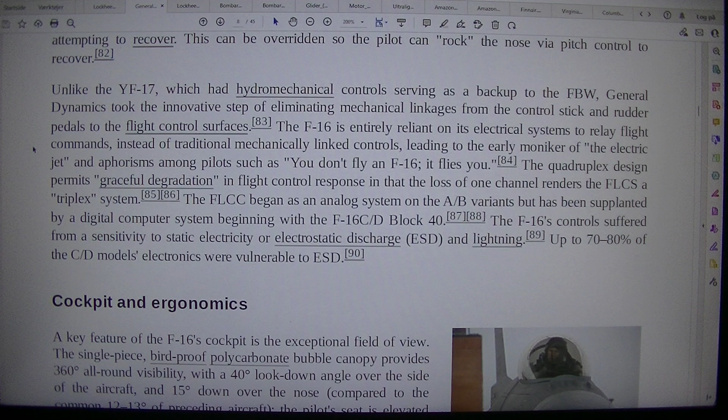The FLCC began as an analog system on the A/B variants but has been supplanted by a digital computer system, beginning with the F-16C/D Block 40.

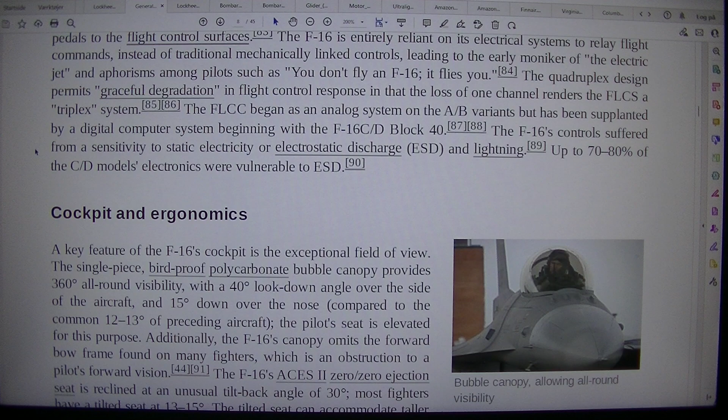The F-16's controls suffered from a sensitivity to static electricity, or electrostatic discharge (ESD), and lightning. Up to 70-80% of C/D models' electronics were vulnerable to ESD.

Cockpit and ergonomics: a bubble canopy allowing all-round visibility. A key feature of the F-16's cockpit is the exceptional field of view.

The single-piece, bird-proof polycarbonate bubble canopy provides 360-degree all-round visibility, with a 40 degree look-down angle over the side of the aircraft, and 15 degrees down over the nose, compared to the common 12-13 degrees of preceding aircraft.

The pilot's seat is elevated for this purpose. Additionally, the F-16's canopy omits the forward bow frame found on many fighters, which is an obstruction to a pilot's forward vision.

The F-16's ACES II 0/0 ejection seat is reclined at an unusual tilt-back angle of 30 degrees. Most fighters have a tilted seat at 13-15 degrees.

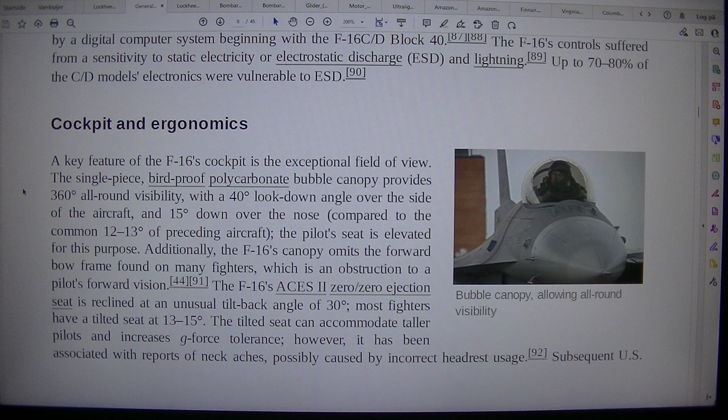The tilted seat can accommodate taller pilots and increases G-force tolerance. However, it has been associated with reports of neck aches, possibly caused by incorrect headrest usage. Subsequent U.S. fighters have adopted more modest tilt-back angles of 20 degrees.

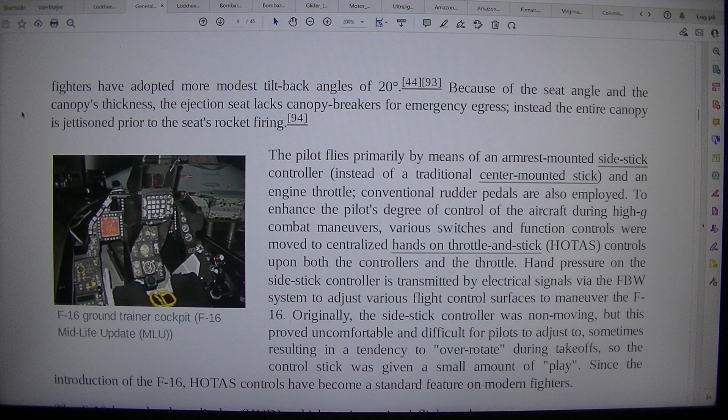Because of the seat angle and the canopy's thickness, the ejection seat lacks canopy breakers for emergency egress. Instead, the entire canopy is jettisoned prior to the seat's rocket firing.

Cramped cockpit of jet trainer, showing dials and instruments. F-16 ground trainer cockpit, F-16 midlife update (MLU).

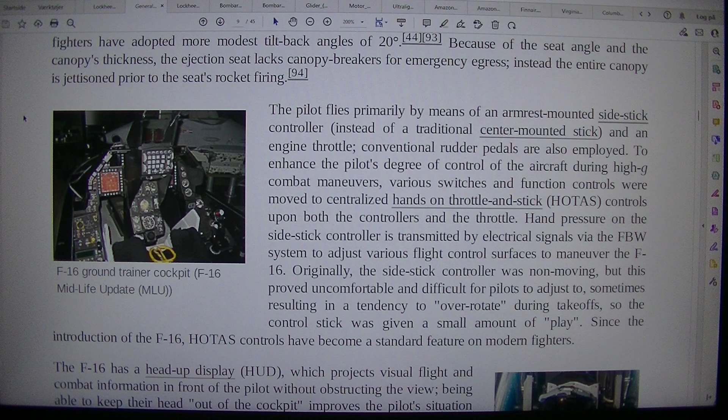The pilot flies primarily by means of an armrest-mounted side stick controller, instead of a traditional center-mounted stick, and an engine throttle. Conventional rudder pedals are also employed.

To enhance the pilot's degree of control of the aircraft during high-g combat maneuvers, various switches and function controls were moved to centralized hands-on throttle and stick (HOTAS) controls upon both the controllers and the throttle.

Hand pressure on the side stick controller is transmitted by electrical signals via the fly-by-wire system to adjust various flight control surfaces to maneuver the F-16.

Originally, the side stick controller was non-moving, but this proved uncomfortable and difficult for pilots to adjust to, sometimes resulting in a tendency to over-rotate during takeoffs, so the control stick was given a small amount of play.

Since the introduction of the F-16, HOTAS controls have become a standard feature on modern fighters. F-16 pilot with joint helmet-mounted cueing system and cockpit head-up display.

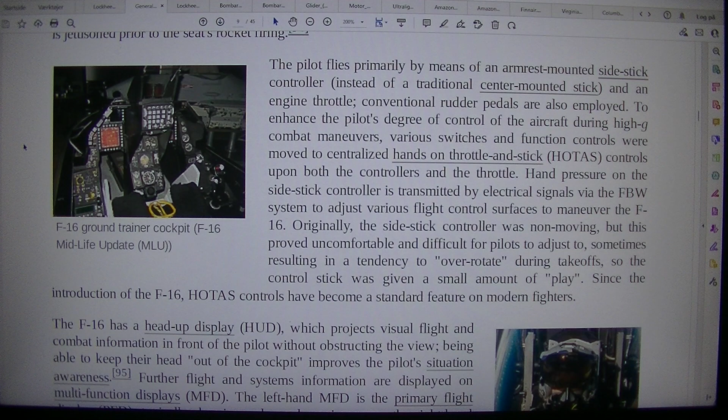The F-16 has a head-up display (HUD), which projects visual flight and combat information in front of the pilot without obstructing the view. Being able to keep their head out of the cockpit improves the pilot's situation awareness.

Further flight and systems information are displayed on multifunction displays (MFD). The left-hand MFD is the primary flight display (PFD), typically showing radar and moving maps. The right-hand MFD is the system display (SD), presenting information about the engine, landing gear, slat and flap settings, and fuel and weapons status.

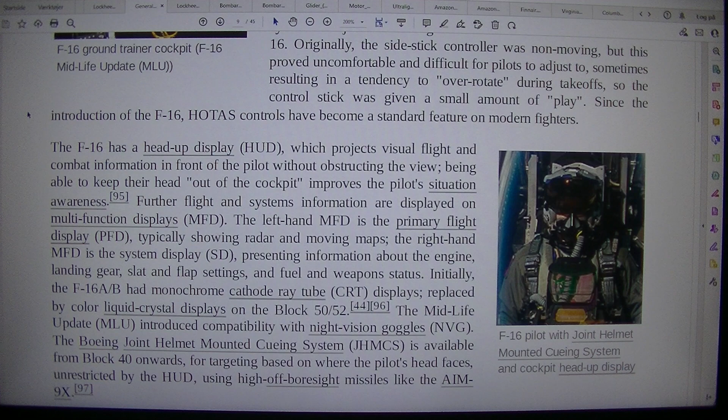The midlife update (MLU) introduced compatibility with night vision goggles (NVG).

The Boeing Joint Helmet Mounted Cueing System (JHMCS) is available from Block 40 onwards, for targeting based on where the pilot's head faces, unrestricted by the HUD, using high off-boresight missiles like the AIM-9X.

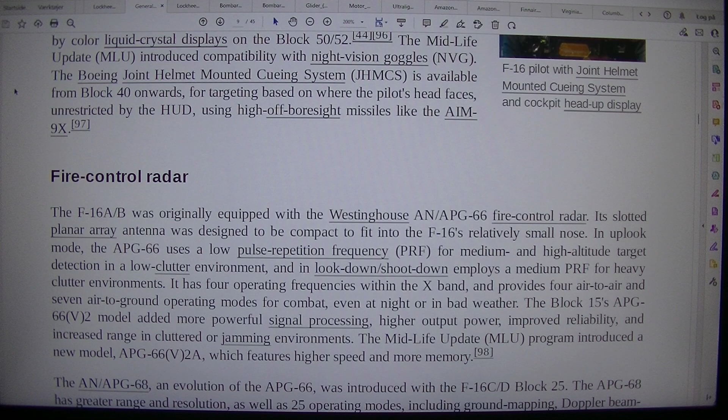Fire Control Radar: The F-16A/B was originally equipped with the Westinghouse APG-66 fire control radar. Its slotted planar array antenna was designed to be compact to fit into the F-16's relatively small nose.

In uplook mode, the APG-66 uses a low pulse repetition frequency (PRF) for medium and high altitude target detection in a low clutter environment, and in look-down/shoot-down mode employs a medium PRF for heavy clutter environments.

It has 4 operating frequencies within the X-band, and provides 4 air-to-air and 7 air-to-ground operating modes for combat, even at night or in bad weather.

The Block 15's APG-66 V2 model added more powerful signal processing, higher output power, improved reliability, and increased range in cluttered or jamming environments. The Midlife Update (MLU) program introduced a new model, the APG-66 V2A, which features higher speed and more memory.

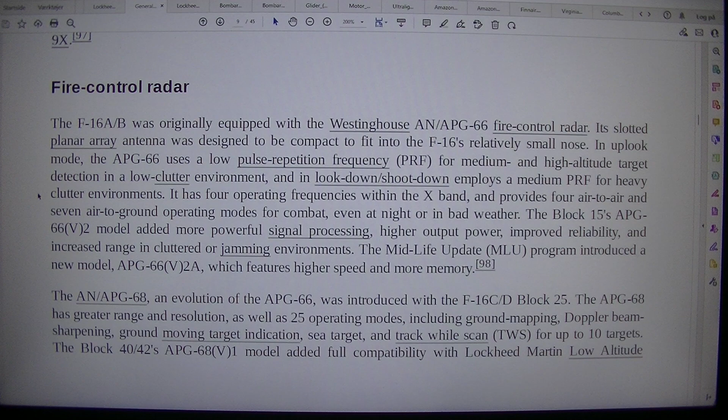The Block 40/42's APG-68 V1 model added full compatibility with Lockheed Martin's low altitude navigation and targeting infrared for night (LANTIRN) pods, and a high PRF pulse Doppler track mode to provide interrupted continuous wave guidance for semi-active radar homing (SARH) missiles like the AIM-7 Sparrow.

Block 50/52 F-16s initially used a more reliable APG-68 V5, which has a programmable signal processor employing very high-speed integrated circuit (VHSIC) technology. The advanced Block 50+/52+ is equipped with the APG-68 V9 radar, with a 30% greater air-to-air detection range and a synthetic aperture radar (SAR) mode for high-resolution mapping and target detection recognition.

In August 2004, Northrop Grumman was contracted to upgrade the APG-68 radars of Block 40/42/50/52 aircraft to the V10 standard, providing all-weather autonomous detection and targeting for GPS-aided precision weapons, SAR mapping, and terrain-following radar (TF) modes, as well as interleaving of all modes.

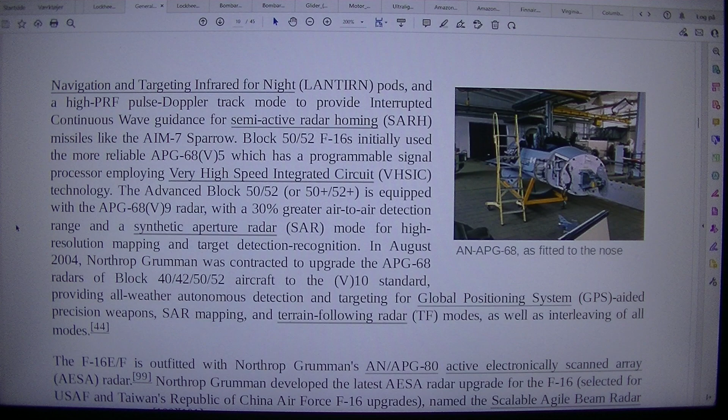The F-16E/F is outfitted with Northrop Grumman's AN/APG-80 Active Electronically Scanned Array (AESA) radar.

Northrop Grumman developed the latest AESA radar upgrade for the F-16, selected for USAF and Taiwan's Republic of China Air Force F-16 upgrades, named the Scalable Agile Beam Radar, SABR.

The APG-83. In July 2007, Raytheon announced that it was developing a next-generation radar, RANGR, based on its earlier AN/APG-79 AESA radar, as a competitor to Northrop Grumman's AN/APG-68 and AN/APG-80 for the F-16.

On the 28th of February 2020, Northrop Grumman received an order from the USAF to extend the service lives of their F-16s to at least 2048 with the APG-83 Scalable Agile Beam Radar (SABR), as part of the Service Life Extension Program (SLEP).

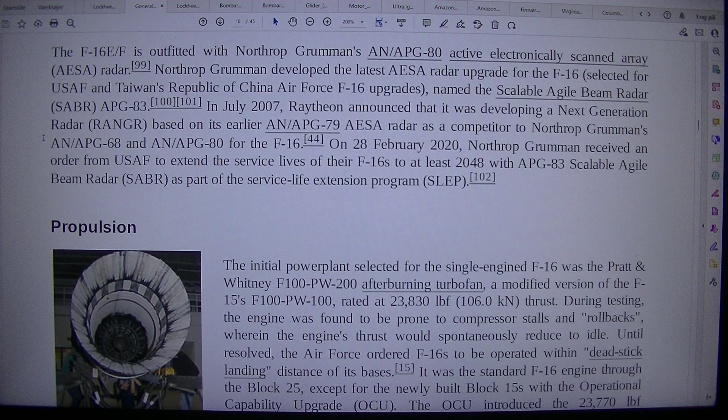Propulsion. Afterburner concentric ring structure inside the exhaust.

The initial power plant selected for the single-engined F-16 was the Pratt & Whitney F100-PW-200 afterburning turbofan, a modified version of the F-15's F100-PW-100, rated at 23,830 lbf (106.0 kN) thrust. During testing, the engine was found to be prone to compressor stalls and rollbacks, wherein the engine's thrust would spontaneously reduce to idle.

Until resolved, the Air Force ordered F-16s to be operated within dead-stick landing distance of its bases. It was the standard F-16 engine through Block 25, except for the newly built Block 15s with the Operational Capability Upgrade (OCU).

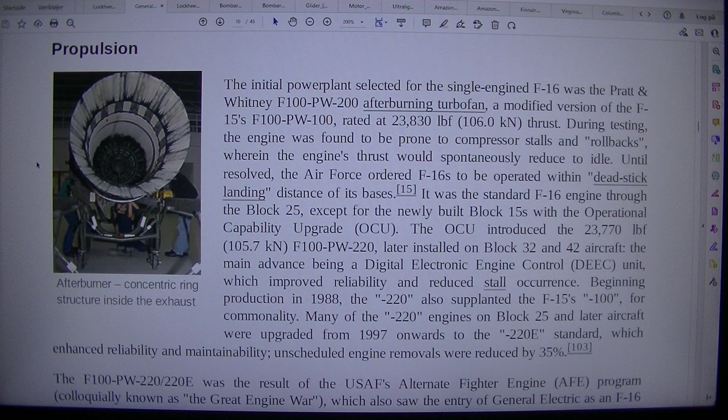The OCU introduced the 23,770 lbf (105.7 kN) F100-PW-220, later installed on Block 32 and 42 aircraft, the main advance being a digital electronic engine control (DEEC) unit, which improved reliability and reduced stall occurrence.

Beginning production in 1988, the -220 also supplanted the F-15's -100, for commonality. Many of the -220 engines on Block 25 and later aircraft were upgraded from 1997 onwards to the -220E standard, which enhanced reliability and maintainability. Unscheduled engine removals were reduced by 35%.

The F100-PW-220/220E was the result of the USAF's Alternate Fighter Engine (AFE) program, colloquially known as the Great Engine War, which also saw the entry of General Electric as an F-16 engine provider.

Its F110-GE-100 turbofan was limited by the original inlet to a thrust of 25,735 lbf (114.47 kN). The modular common inlet duct allowed the F110 to achieve its maximum thrust of 28,984 lbf (128.93 kN).

To distinguish between aircraft equipped with these two engines and inlets, from Block 30 series on, blocks ending in 0, for example Block 30, are powered by GE, and blocks ending in 2, for example Block 32, are fitted with Pratt & Whitney engines.

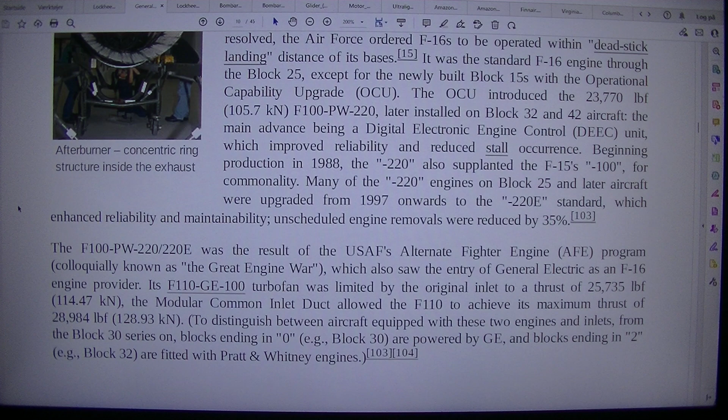29,588 lbf (131.61 kN) F110-GE-129 on the Block 50, and 29,160 lbf (129.7 kN) F100-PW-229 on the Block 52.

F-16s began flying with these IPE engines in the early 1990s. Altogether, of the 1,446 F-16C/Ds ordered by the USAF, 556 were fitted with F100 series engines and 890 with F110s.

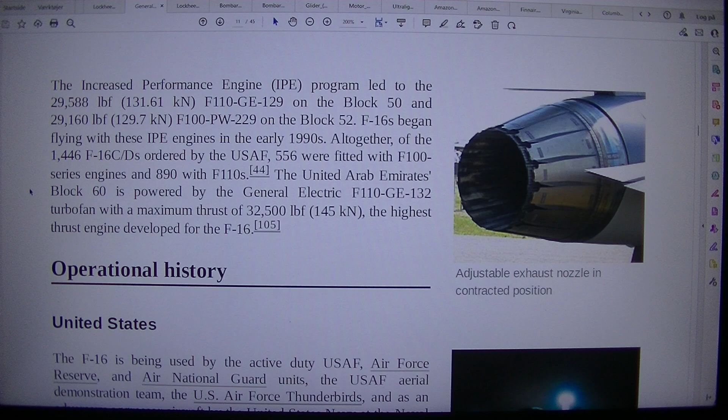The United Arab Emirates Block 60 is powered by the General Electric F-110 GE132 turbofan with a maximum thrust of 32,500 lbf, 145 kN, the highest thrust engine developed for the F-16.

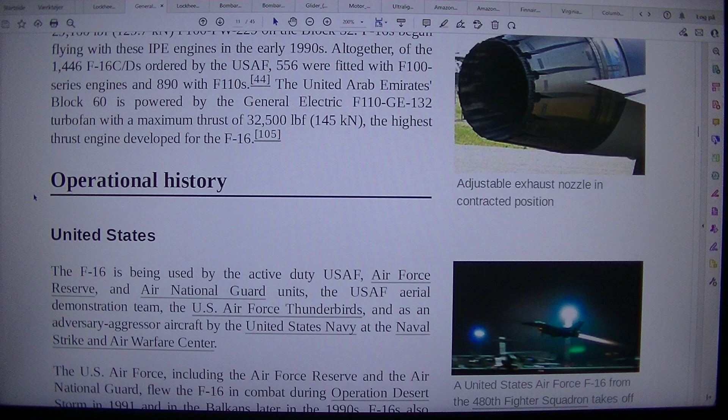Operational history: United States. A United States Air Force F-16 from 480th Fighter Squadron takes off from Spangdahlem Air Base in support of Operation Odyssey Dawn. The F-16 is used by the active duty USAF, Air Force Reserve, and Air National Guard units, the USAF Aerial Demonstration Team, the U.S. Air Force Thunderbirds, and as an adversary aggressor aircraft by the United States Navy at the Naval Strike and Air Warfare Center.

The U.S. Air Force, including the Air Force Reserve and the Air National Guard, flew the F-16 in combat during Operation Desert Storm in 1991 and in the Balkans later in the 1990s. F-16s also patrolled the no-fly zones in Iraq during Operations Northern Watch and Southern Watch and served during the war in Afghanistan and the war in Iraq from 2001 and 2003 respectively. In 2011, Air Force F-16s took part in the intervention in Libya.

On September 11, 2001, two unarmed F-16s were launched in an attempt to ram down United Airlines Flight 93 before it reached Washington, D.C. during the September 11, 2001 terrorist attacks. But Flight 93 was brought down by the passengers first, so the F-16s were retasked to patrol the local airspace and later escorted Air Force One back to Washington.

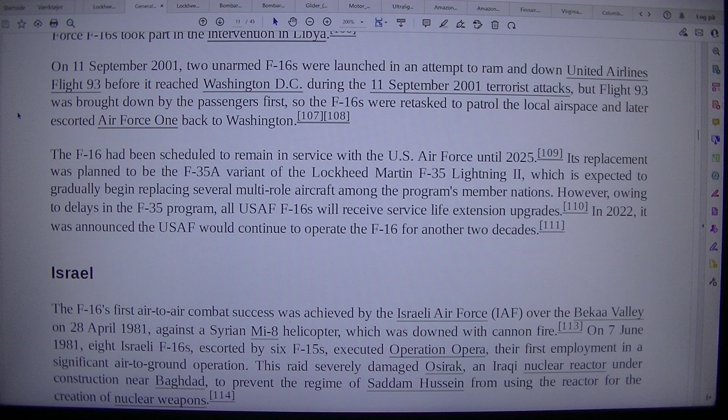However, owing to delays in the F-35 program, all USAF F-16s will receive service life extension upgrades. In 2022, it was announced the USAF would continue to operate the F-16 for another two decades.

Israel: The F-16's first air-to-air combat success was achieved by the Israeli Air Force, IAF, over the Bekaa Valley on April 28, 1981, against a Syrian Mi-8 helicopter, which was downed with cannon fire.

On June 7, 1981, 8 Israeli F-16s, escorted by 6 F-15s, executed Operation Opera, their first employment in a significant air-to-ground operation. This raid severely damaged Osirak, an Iraqi nuclear reactor under construction near Baghdad, to prevent the regime of Saddam Hussein from using the reactor for the creation of nuclear weapons.

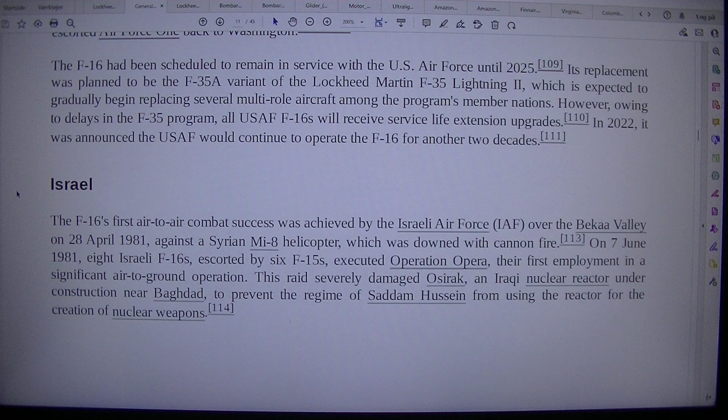Israeli Air Force F-16A Netz 107 with 6.5 kill marks of other aircraft, a record for an F-16, as well as 1 kill mark of an Iraqi nuclear reactor.

The following year, during the 1982 Lebanon War, Israeli F-16s engaged Syrian aircraft in one of the largest air battles involving jet aircraft, which began on June 9 and continued for 2 more days. Israeli Air Force F-16s were credited with 44 air-to-air kills during the conflict.

In January 2000, Israel completed a purchase of 102 new F-16I aircraft in a deal totaling $4.5 billion.

F-16s were also used in the ground attack role for strikes against targets in Lebanon. IAF F-16s participated in the 2006 Lebanon War and the 2008-09 Gaza War.

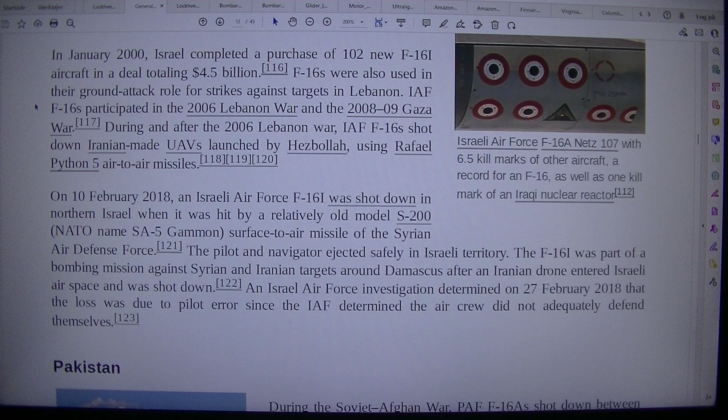During and after the 2006 Lebanon War, IAF F-16s shot down Iranian-made UAVs launched by Hezbollah, using Rafael Python 5 air-to-air missiles.

On February 10, 2018, an Israeli Air Force F-16I was shot down in northern Israel when it was hit by a relatively old Model S-200, NATO-named SA-5 Gammon, surface-to-air missile of the Syrian Air Defense Force.

The pilot and navigator ejected safely in Israeli territory. The F-16I was part of a bombing mission against Syrian and Iranian targets around Damascus after an Iranian drone entered Israeli airspace and was shot down.

An Israel Air Force investigation determined on February 27, 2018 that the loss was due to pilot error, since the IAF determined the aircrew did not adequately defend themselves.

Pakistan: The PAF F-16 serial number 84-606, which shot down one of the Indian jets during Operation Swift Retort, has a kill mark visible on its nose. During the Soviet-Afghan War, PAF F-16s shot down between 20-30 aircraft.